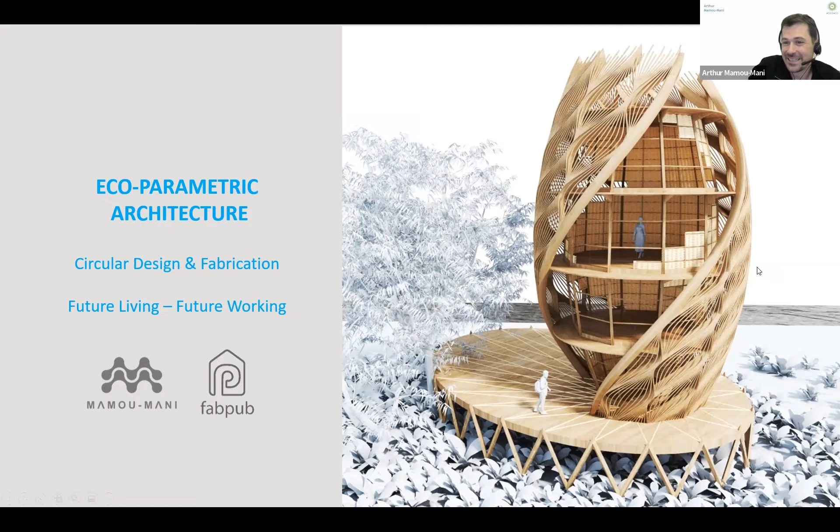You might have heard of us through what we did at Burning Man. Burning Man is a city of the future really, an experimental city where 70,000 people come together around common values, common principles, which I'll explain a little bit more.

I think it will be interesting to see that as part of exploring future cities, beyond living and working in general. Something I find really interesting about that place is that it creates communities that try and improve and change things.

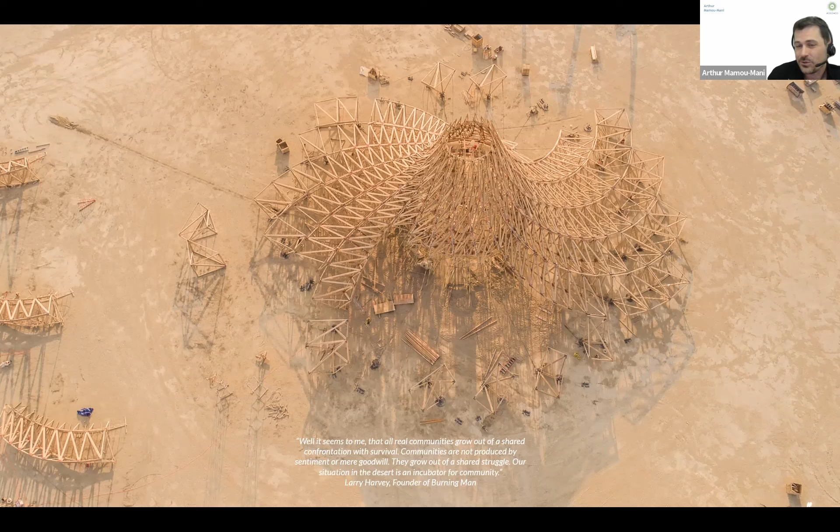The founder of Burning Man says that real communities grow out of a shared confrontation with survival—they're produced through shared struggle. It's really interesting to see how that shared struggle creates pockets of initiatives which eventually change the world. I think there's very much that shared struggle around the idea of climate change that we're all trying to address through our different fields.

There's another thing I thought was really interesting. I don't know if you've read the book by Harari called Sapiens, where he says maybe humans switched from being hunter-gatherers to civilization and crops not because they wanted increased productivity, but because they wanted to build and run temples.

I thought that's really interesting, because our spiritual self is maybe what united us. So beyond functionality—I know modernism was all about functionalism—maybe there's a higher dimension that unites us, something a bit more subtle that we'll discover together, and maybe that's what differentiates a pure technical approach from a slightly higher level one.

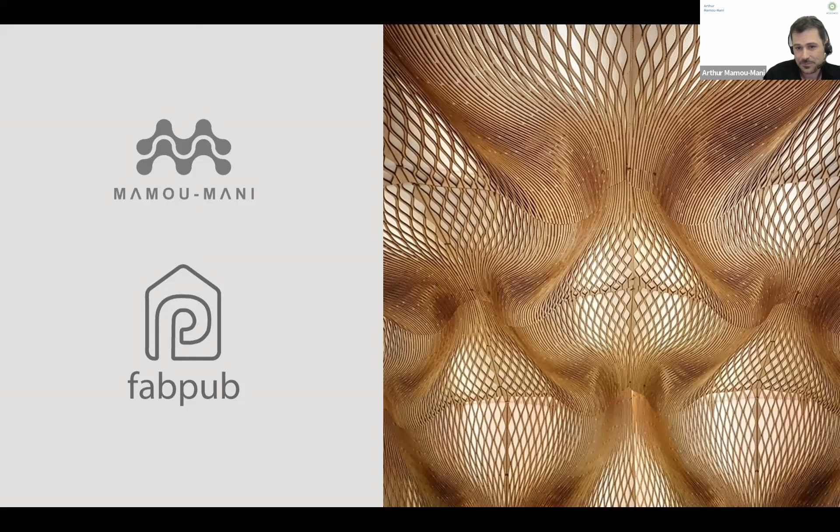So those are our two businesses that work hand in hand. This is our studio in London. We tend to produce things in our office—we're a bit of a mini factory.

Beyond that, I'm very inspired by people like Jean Prouvé—I don't know if you know him. He was a French engineer type who also had his factory in his office kind of thing, and that allows you to produce the thing rather than a representation of the thing, which I think is really important when it comes to understanding carbon footprint.

This allows us to not be fearful of creating. I think when it comes to environmental design, the answer is always that nothing is better than something, because if you just measure carbon, you might as well not exist. So it's really important that we enable creativity without that sort of self-shame, in a way.

So to create ecosystems where we can recycle, where we can use materials that don't come from petroleum, is really important. This is called PLA, polylactic acid, and it's basically a material that comes from sugar.

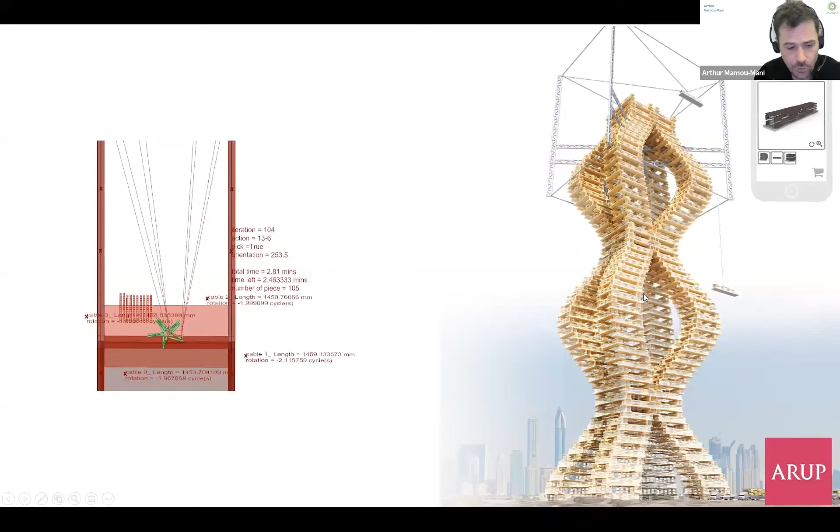But actually, when it comes to environmental design, there are many axes to consider, and that's what life cycle assessments can do.

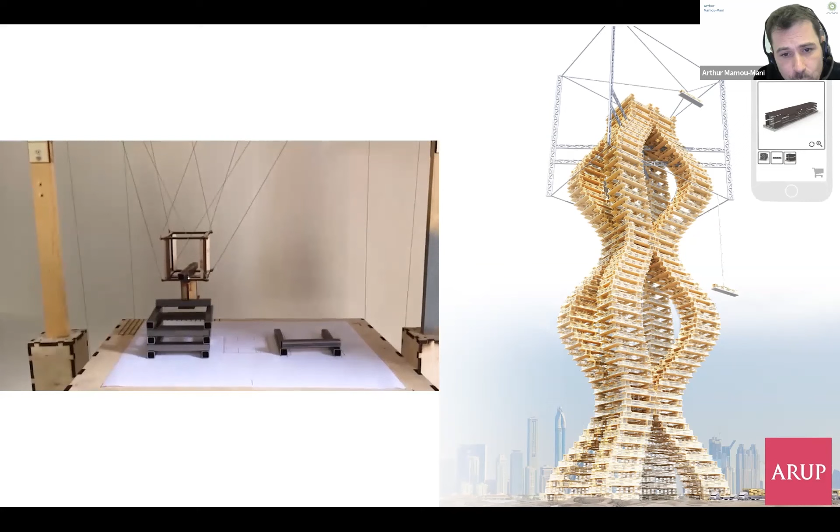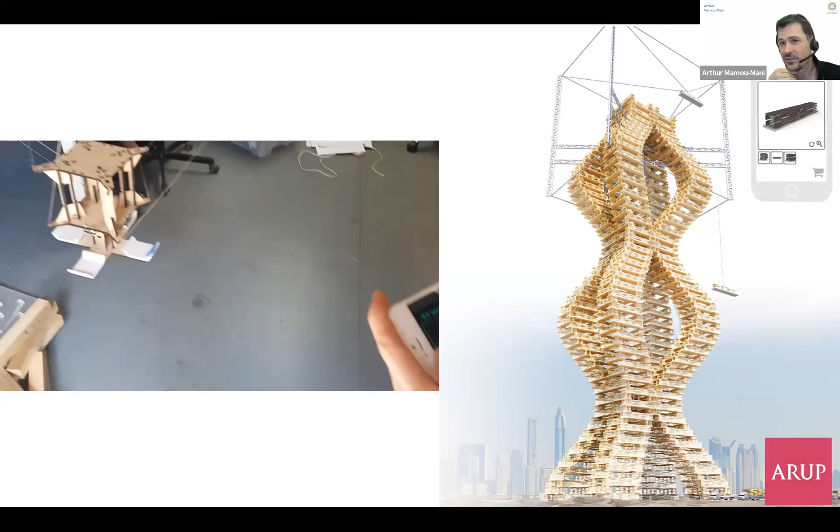So this is a larger speculation of what the future of living could be—a sort of giant skyscraper that not only can build itself but also unbuilds itself. Now, I think this idea of unbuilding is completely overlooked.

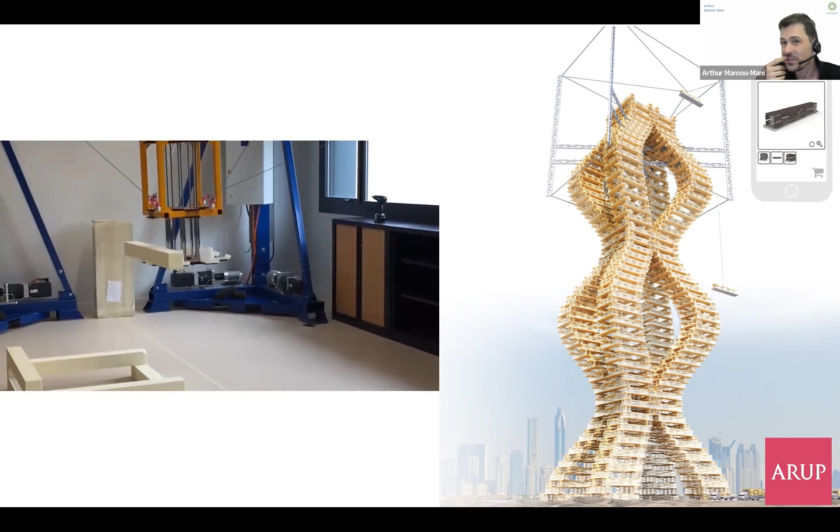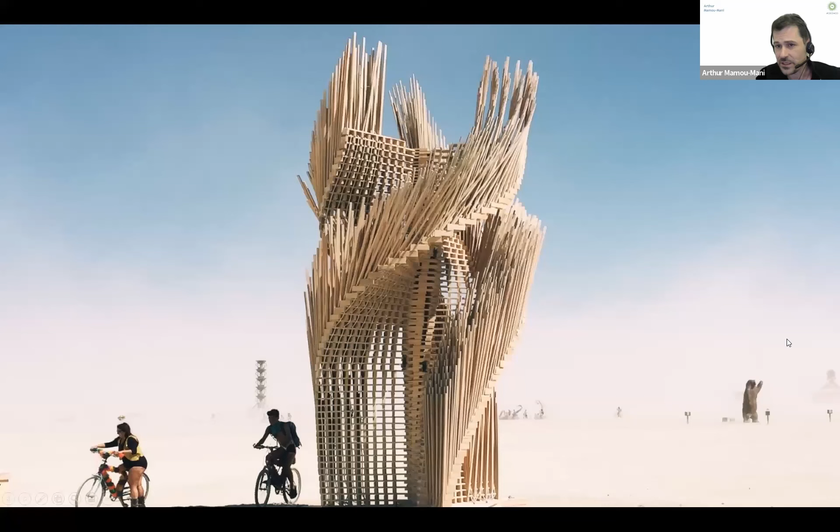It's actually really natural: when a plant doesn't have enough light or water, it just dies, and another plant grows somewhere else. The natural cycle enables that freedom. But when it comes to architecture, you're suddenly stuck with ruins for thousands of years, if you're lucky, like the Parthenon. Most generally, people don't think of the afterlife of a building.

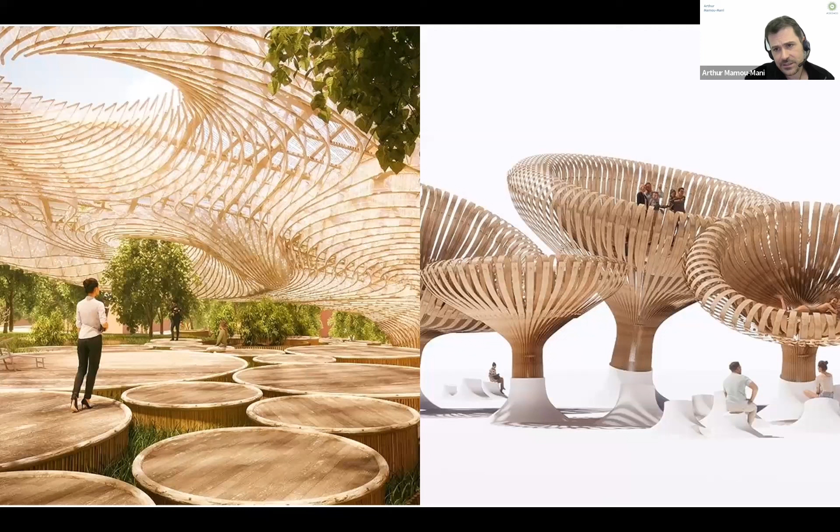I've pretty much been inspired by Burning Man, because you have to think of this afterlife—you have to leave no trace. Bringing this idea of ecological thinking to parametric design is why, I guess, this term eco-parametric came about, because often we think of technology for its own sake versus in relation to natural behaviors.

So this is, for example, some student project that we worked on. This was bamboo being folded according to magnetic fields, with the center of the magnetic points being natural. And this was a sort of piazza that used steam-bent timber.

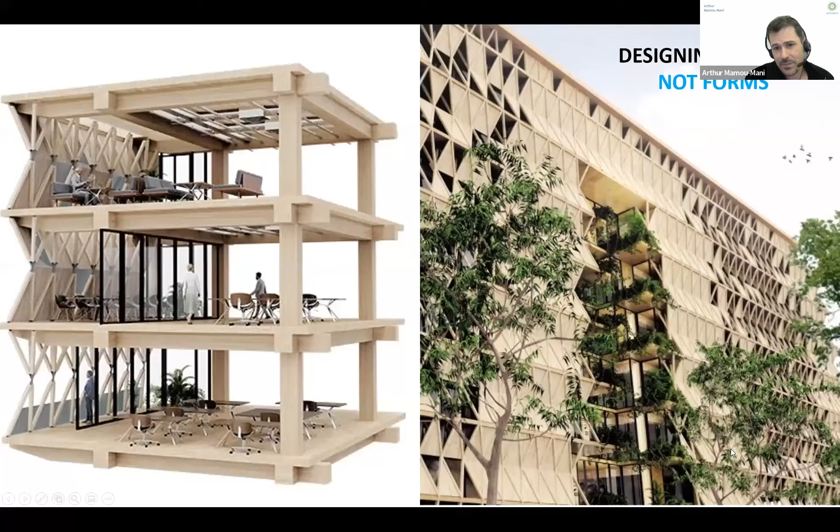This was a slightly more conventional project, looking at the typical module size of a building—using off-the-shelf material, using it as a voxel, and being able to dissolve this timber to create a system rather than a form. I think this notion of system versus form is really important, because then you stop thinking in a top-down fashion and more in a bottom-up way.

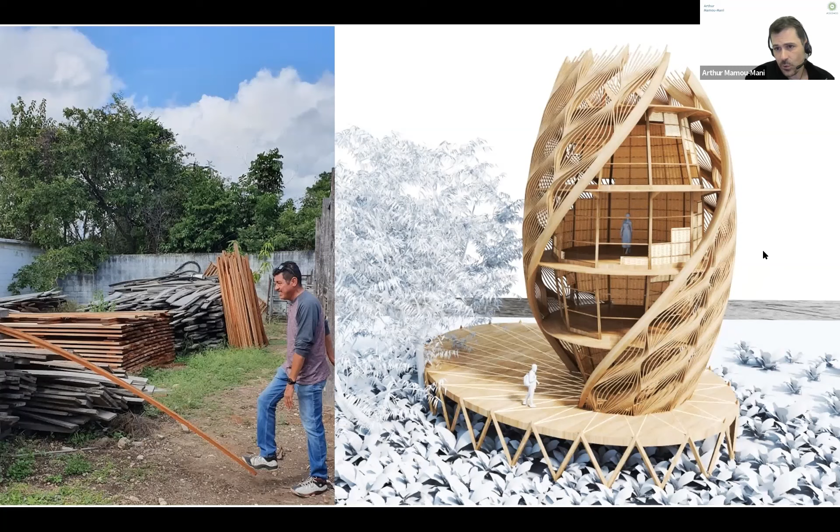In that spirit, this is a project we're doing in Bacalar in Mexico. We based it on the bending radius of timber, and if you were to unfold these things, they would all unfold into straight lines. That's a really important concept, because before, when I was studying digital architecture, we were told you could CNC everything. But when you CNC things, you create a lot of waste.

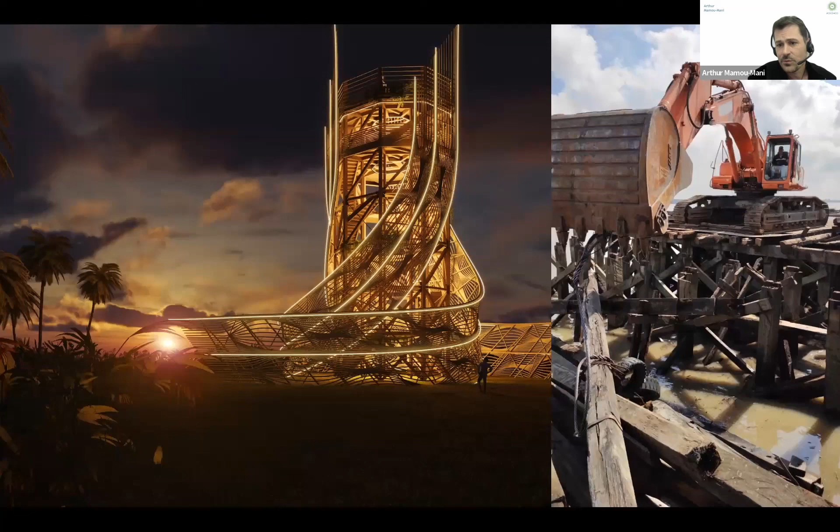You use plywood, which is already a processed material, and then you cut it and create waste. Whereas these are all bent digitally into straight elements, so you actually use timber—the tree—straight out of what it is. I think when you minimize chemical processes, you can also help the life cycle assessment of materials.

When you say 'I'm using wood,' that might not be enough—you might need to dig into what wood, where it came from, which forest it came from. In this case, we're building a tower in Bali, and the client bought an old bridge—a colonial bridge from Indonesia, a Dutch colonial bridge.

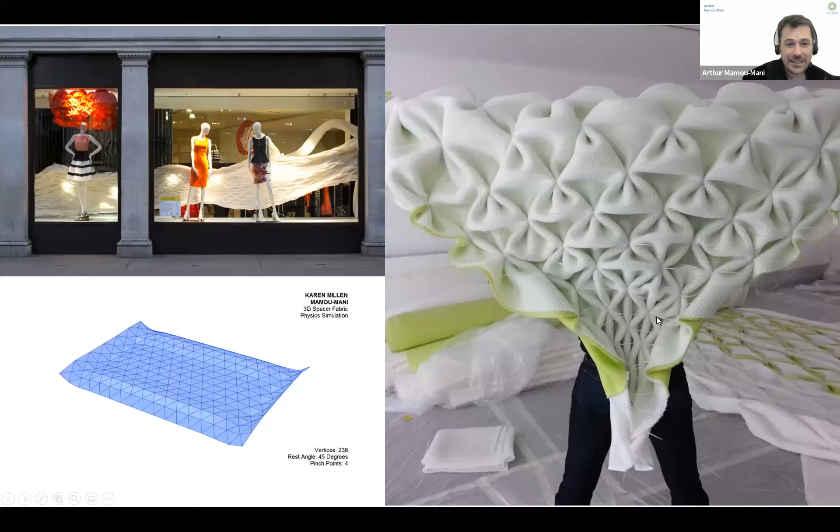He bought it, took off all the timber, removed all the screws, and then built the tower on the left. I think that's a really interesting, beautiful thing—that we don't have to think of projects as their end goal. You can think of your project becoming someone else's project later on.

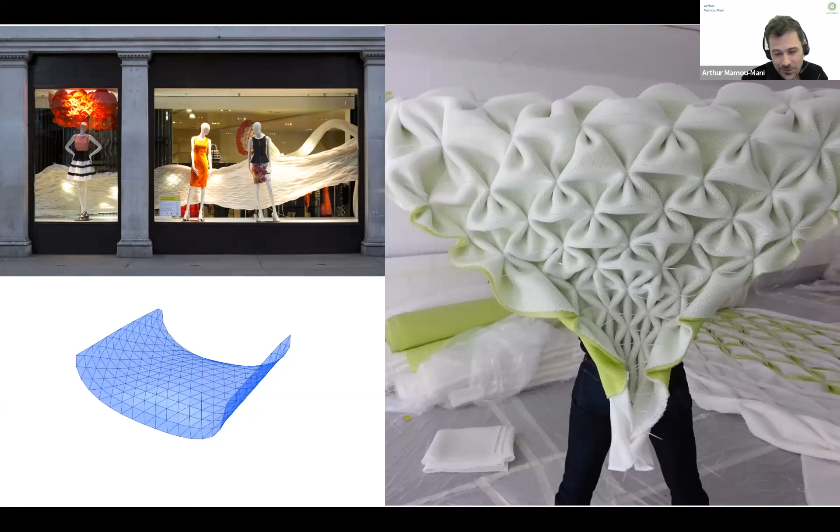That spirit is a bit strange for architects, because we have big egos—as you know, we're known for this kind of character. I think that's really something that needs to change in order for our profession to progress towards accepting things as systems that are beyond us.

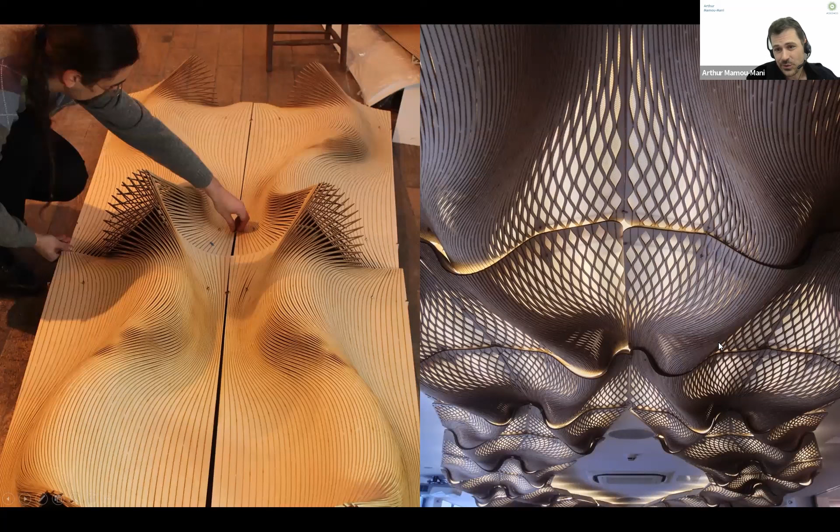So these are a few projects I'm going to show you. This is where we started making a lot of projects ourselves, as opposed to just designing them. This is the wooden wave, and the previous one was a fashion retail experience.

These are based on double curving materials with lattice hinges, with origamis. They're very modular, in that it's one module that adapts through the compression and expansion of what we call Bézier splines. Bézier splines—there was a French engineer who worked at a car manufacturer that had to describe the curvature of cars through an algorithm. We use that algorithm to bend and expand space.

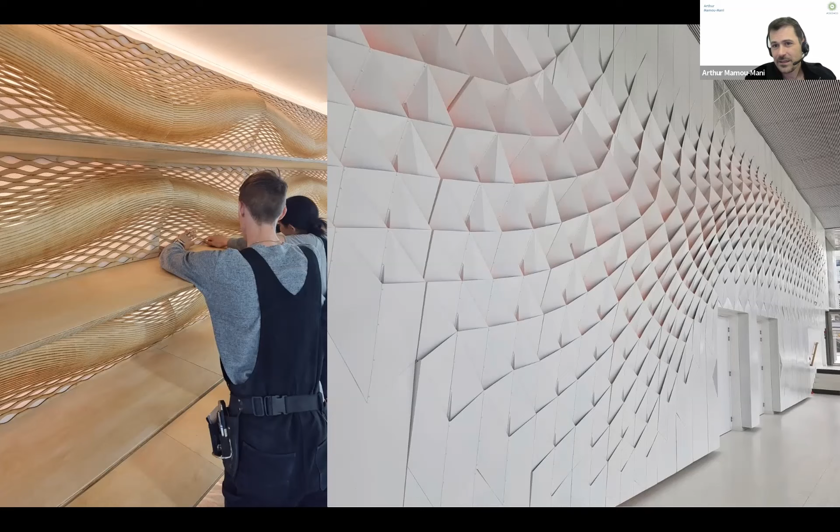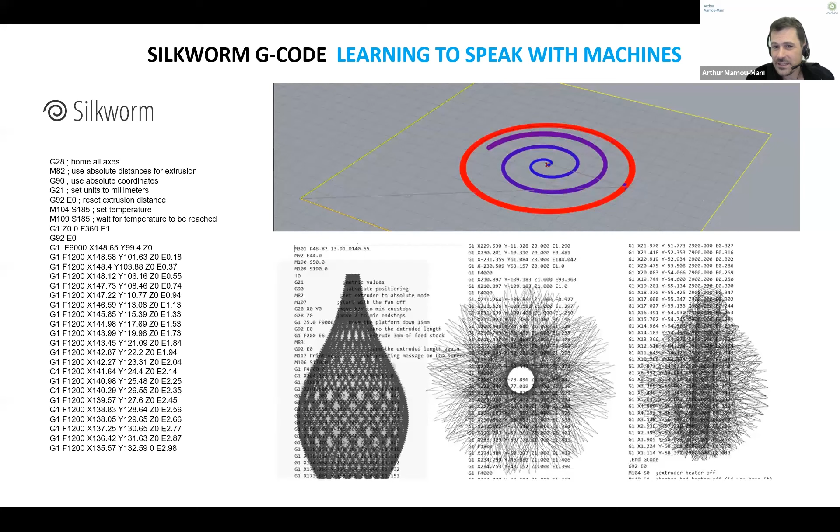It's become a bit of a thing where we try to link that to the lines and extract information for the robots. This is called G-code—it's the information you send to a 3D printer. It's important to understand what it is that you send to a printer, because then you are completely free of constraint, and that means you can be a lot more accurate in the way you design three-dimensional things.

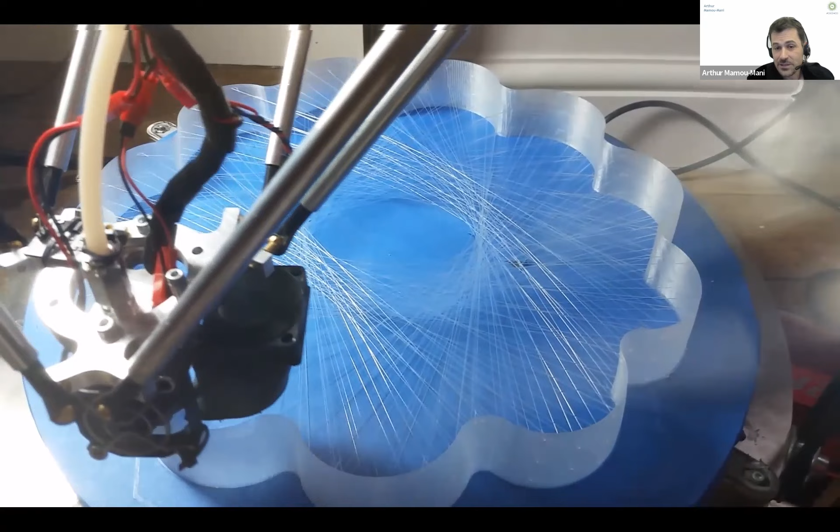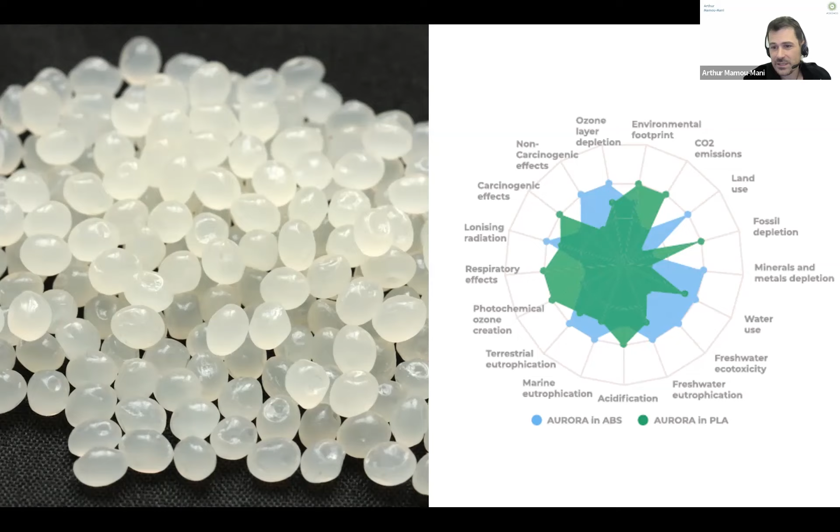Because you're in direct discussion with the craftsman—in this case, the robot. There is a conversation, although it's a robot, that is important to have, because otherwise you cannot be very precise in your analysis of how things are made.

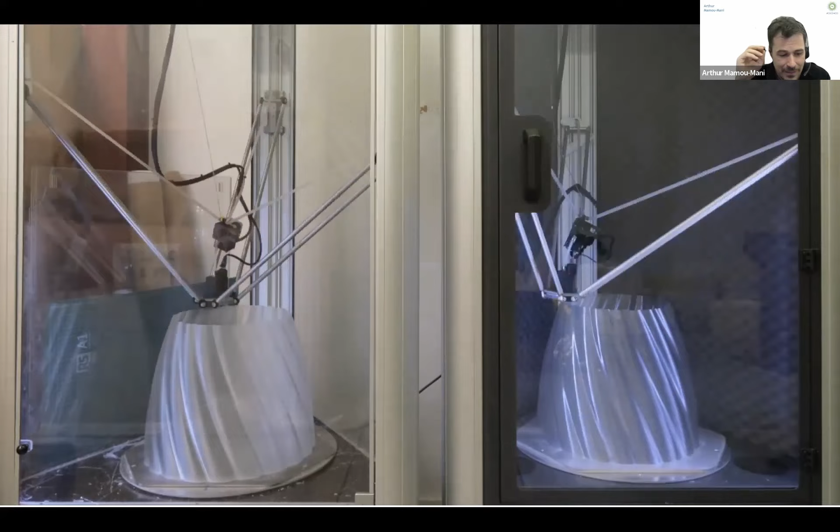So we've taken crazy challenges and keep doing so. I think for some reason, every one of those challenges pushes us to think differently. This, for example, was an installation for Fortnum and Mason in London, and the curvature you're seeing allows us to build very thin shells. Very thin shells are important because you use less material.

So not only do we use sugar, fermented sugar, but we try to minimize the amount of material in order to—and people were very surprised how light these objects were. Because they're light, it means we use less material, and everything has a sort of consequence.

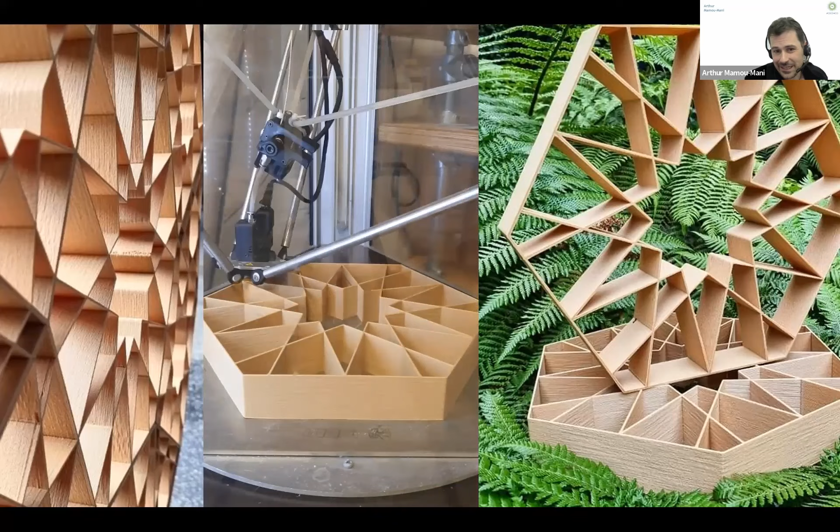We can mix it with wood to create patterning that is less mass produced, to some extent. This is my home in Stoke Newington that we're about to finish, and I look forward to showing you all how it looks. It has a lot of materials that are not petroleum based, and it's very hard to find them for the home—whether it's the fermented sugar of the balustrade, the clay we're using everywhere, clay boards, clay finishes, recycled glass, and so on.

Kebony wood for the facade. Kebony is a pine that's treated so it behaves like teak. It's a very common tree that's just had a resin added to it.

There's a lot of learning curve, and no limit in scale. I put this in because this is my wife's engagement ring, and I worked on it in a similar way to the rest of the project, which shows that I really mean it. This was 3D printed, then the white gold was cast using the lost wax method—the print was replaced with gold, and the sapphires were scanned and introduced in there.

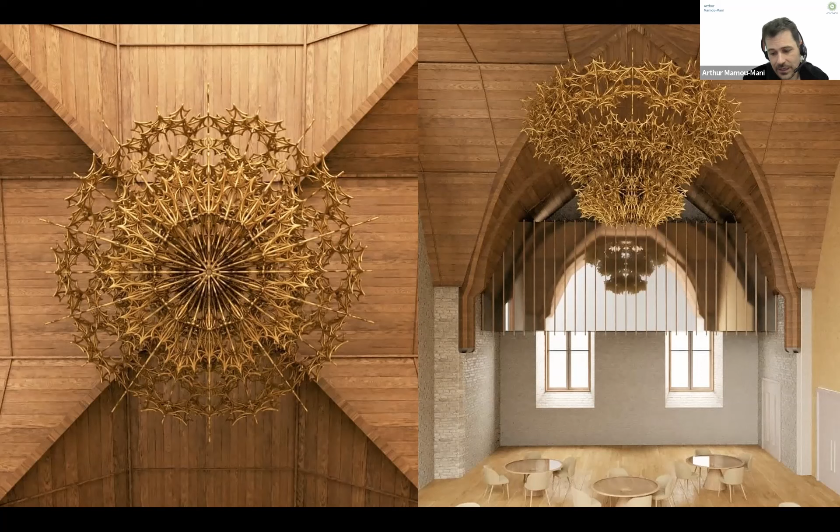This is a chandelier we're doing in the north of the UK, in Scotland, which is 3D printed in a mixture of fireproof material together with bioplastic and metal. So those are things that we can explore.

We've kind of proved to some extent that we can scale up slowly. It's getting there—we're approaching the facade world now.

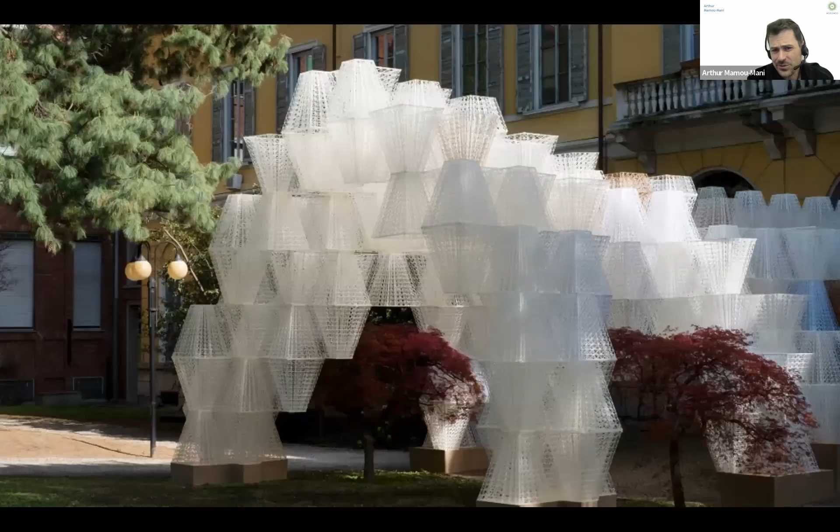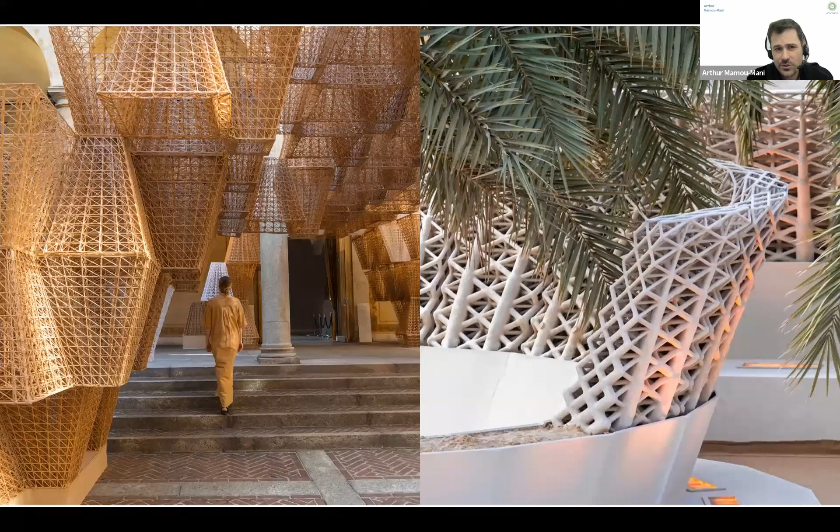This was for Cos, a fashion brand. It's called Conifera, a project made of 700 bio bricks placed together to form this sort of journey, as opposed to a form. It wasn't quite a form—it was more of a journey that went from the earthly to the sky. You can see these almost look like they were hand woven, which is quite interesting.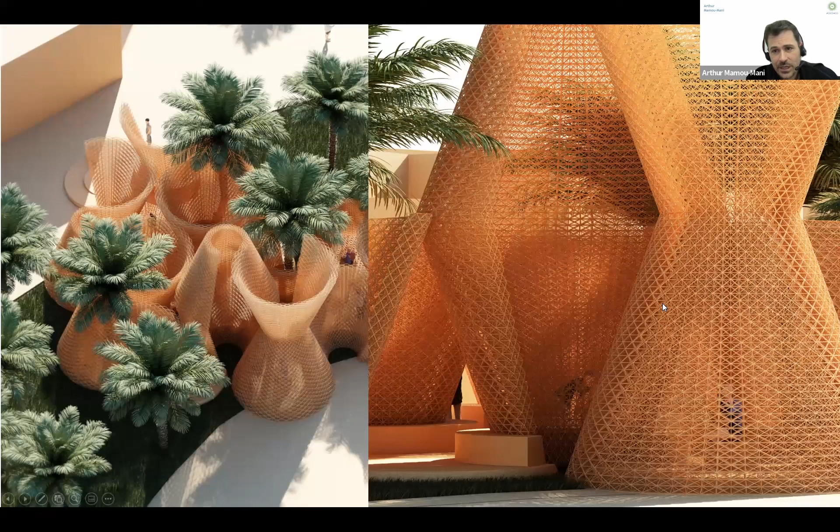This was a project we did with Chris Precht, a great architect from Austria. It was 3D printed in sand. We started by looking at that space and playing with the trees that were there, and developed this module that we later realized we could print with local material, i.e. sand—you can see the biophilic link here. Biophilia just means the love for nature, the understanding of nature, and being part of it. Each of those lines changes in thickness based on the forces going through the system.

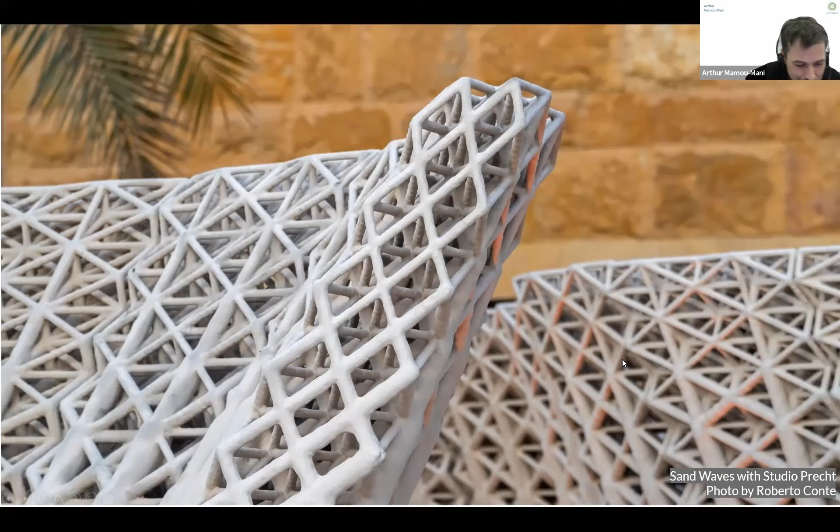All right, 14 minutes—I have 6 minutes, and I want to bring you a little bit more into the desert. Bear with me. This is Burning Man, which has 10 principles that I think are really important for the future of living, whether it's radical inclusion, self-reliance, self-expression, or communal effort.

You can recognize a lot of the discussions happening at the moment about inclusion and environmental issues within the principles of Burning Man, which is why I find it so interesting. It's also heavily inspired by the Californian ideology and things like Buckminster Fuller's idea of spaceship Earth—that we all need to consider everything as an integral, holistic system rather than separated elements.

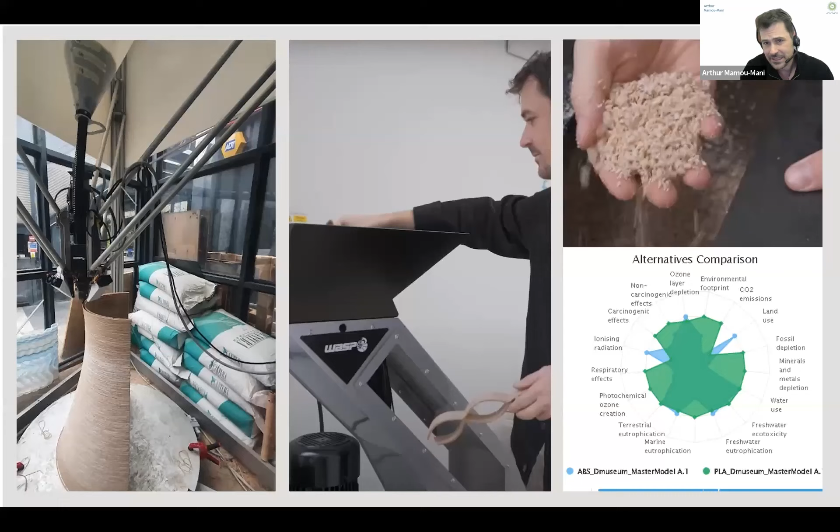So I showed you that. This is a city of 70,000 people that unite for a week, create, then unbuild itself and recreate itself, where everyone is a bit of an actor of the city rather than just a spectator—so an artist. Instead of doing art about the state of society, we do art that creates society around it, as Larry Harvey, the founder, was saying.

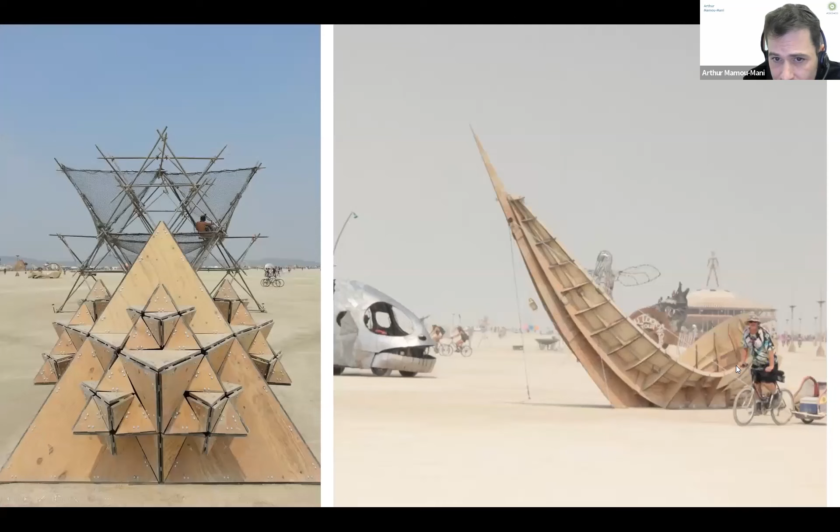With our students at Westminster, we've been trying to experiment with what that means. This is, for example, a piece of ply cut in half creating this reciprocal structure that leads to projects which are simple to build and assemble, based on wasteless designs. These are some examples of what we've built and learned, from very complex parametric digital stuff to simple 2x4 pieces of wood assembled together.

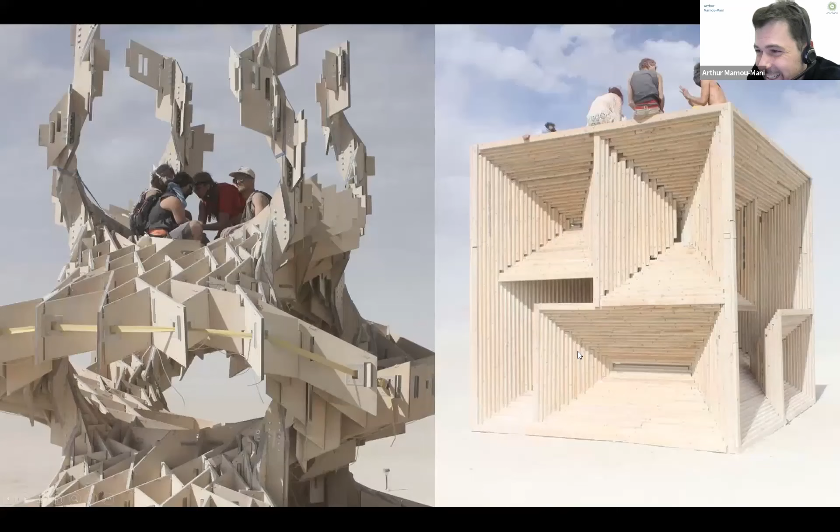We've learned a lot about transportation. This is a truck with the project that was on the right, while the project on the left was placed messily in the truck. I remember the truck driver telling us that the truck is probably one of the most important designers in the structure—the truck itself. When I talked about having a discussion with a robot, you can have a discussion with your truck as well, or with your plane, or with your shipping elements.

And I think that's really something we ignore: the logistics, and the logistics are key to the building being actually green or not. So this is on the right, the bismuth bivouac, and then on the left, the project we never finished. That was a very complex puzzle.

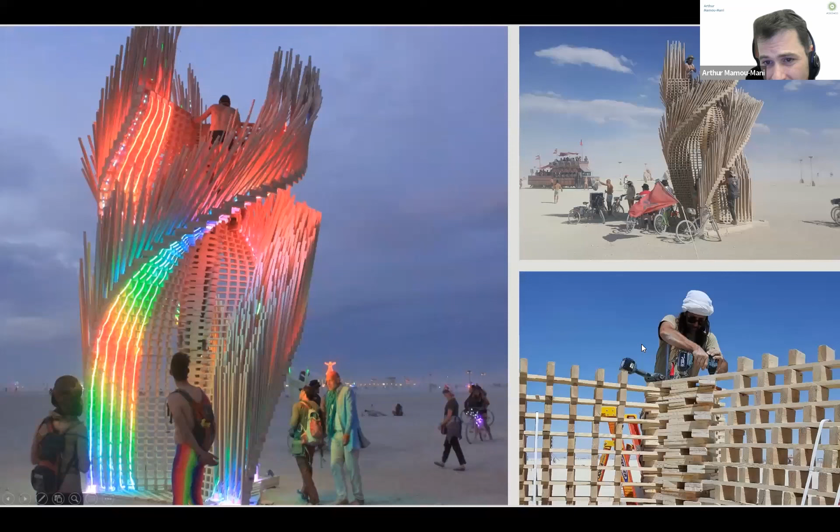We've learned a lot from off-the-shelf timber, how wood comes out, how it can be cut simply, and how we can create structures that follow mathematical rules.

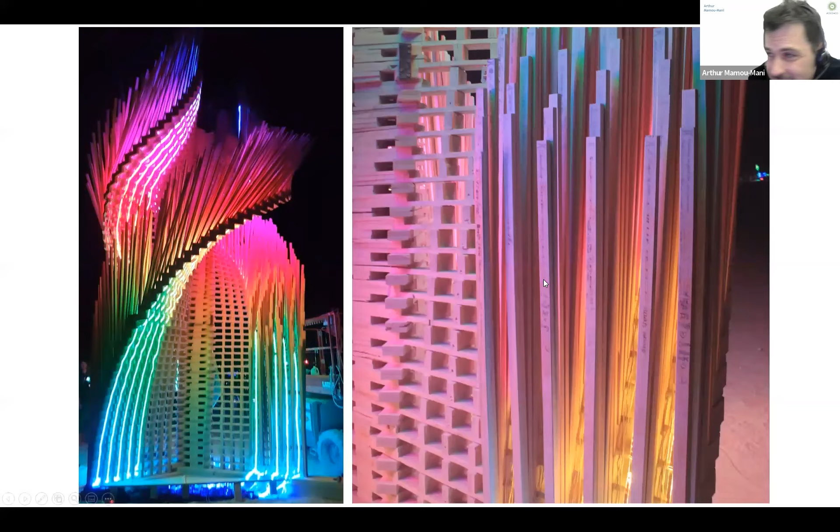I just want to show you this little video of the LEDs going through these tangents. And you can see on the right, people writing down their dreams. There was a really nice dialogue with the community, which we thought was really interesting.

This is the temple at Burning Man. Every year Burning Man has a temple where people can write things on the structure, and it's often quite emotional things.

At the time I was working on a hotel for Virgin Galactic, which is about going to space and doing space tourism. They needed a hotel before going to space, and this idea of a sort of recursive galaxy came about.

So this is very simple. It's a recursion in the computer. You tell information to a vector, you say it to move, rotate, on and on and on. But as you do this, you can change the parameters, the angle, the length, and so on.

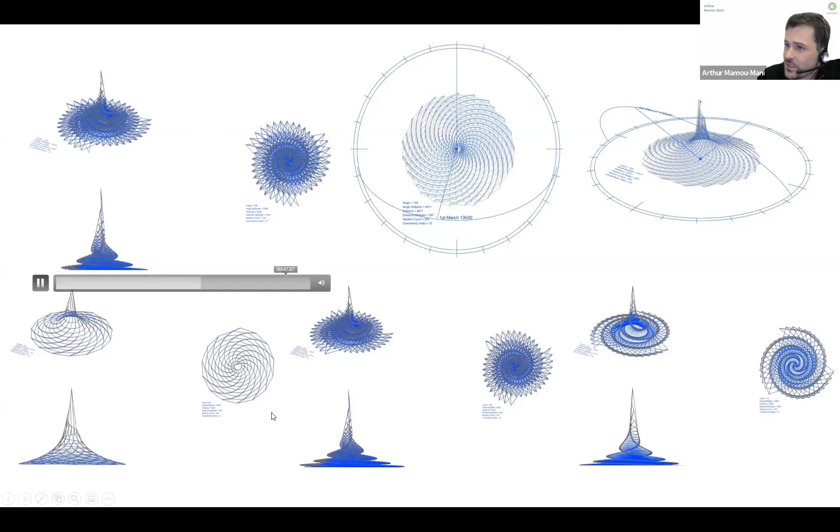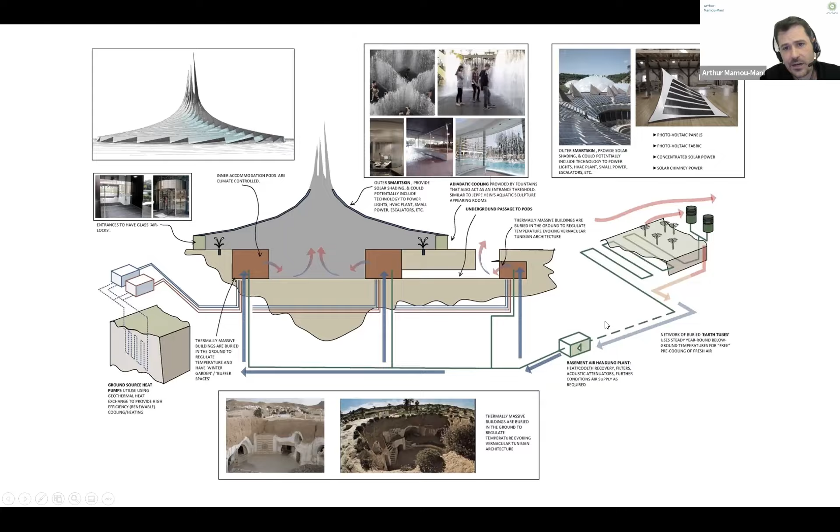What I find interesting is when you start linking this with environmental design, for example letting the light go through in winter and diffusing it in summer, but also looking at the thermal mass of things, like how we can use the cold air to minimize air conditioning. Air conditioning is about 10 times worse than CO2, so we can work with all these aspects to think of the structure as a system.

Galaxia was a sort of reinterpretation of that building in the desert, based again on compression and expansion of space. You can see the center of Galaxia being a lot denser than the rest, because it's based on the black hole idea that it would compress and take everything with it.

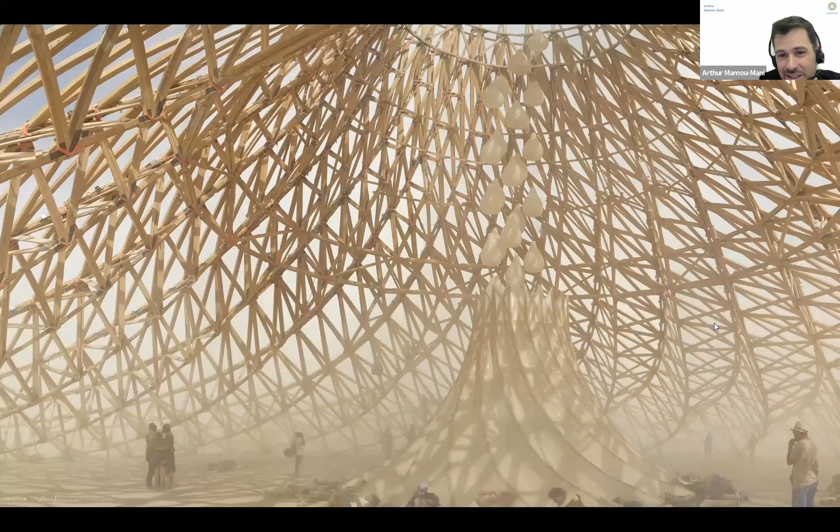It starts with portals for humans and then goes through. What's interesting is how people were using that project as a secular temple, and everyone saw the sort of metaphorical aspect of every piece. There's no columns, so everything seems to float and works together as opposed to in a hierarchical fashion.

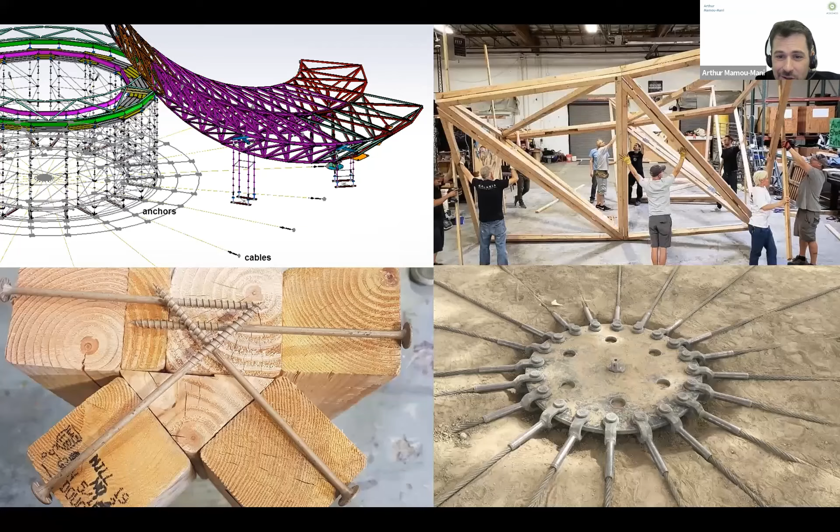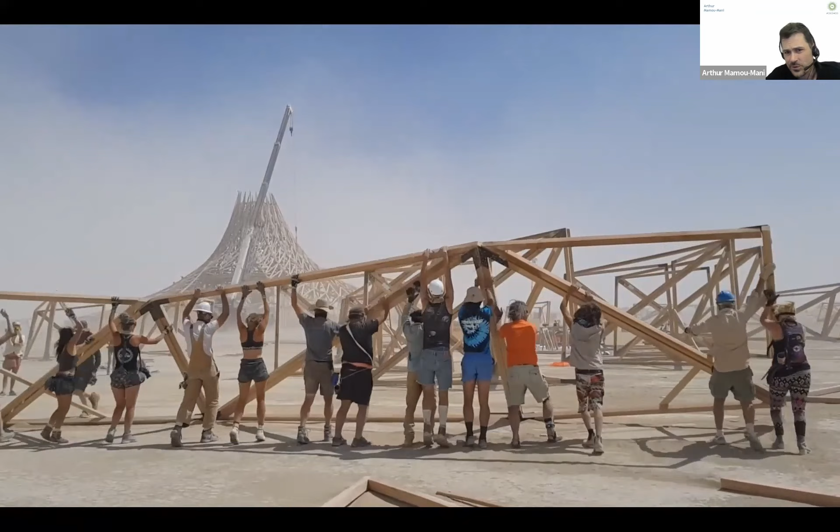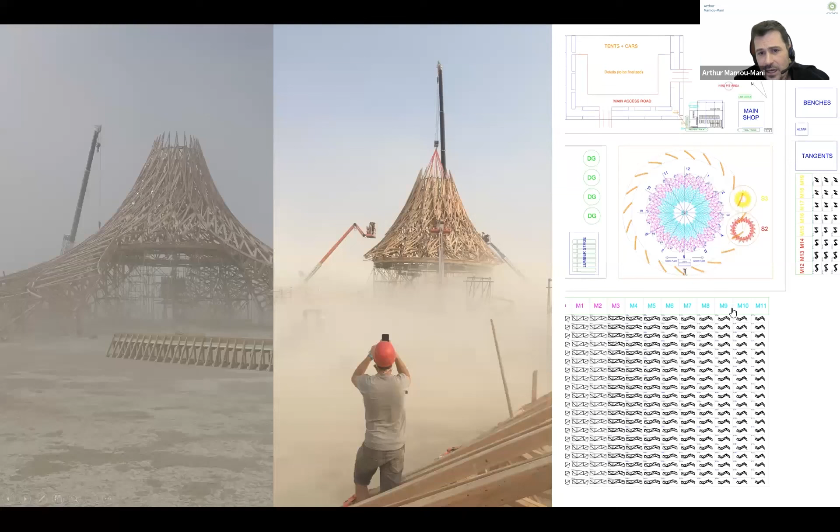You can see how it was built with a big bike wheel in the center that held everything together, because we couldn't build foundations, for example. Each one of those modules were assembled into these bricks as well, similar to the Conifera project, but these bricks were assembled in timber with laser cut metal connections actually targeted towards the forces going through the project. We were all together, 120 volunteers building this, living together, building this for about 18 days.

And built from the top down, to give a positive spirit to the team, because it was hard. It was very hard, very intense. We built this from the top down, which I think is quite interesting.

Then we opened it to the public and had these really beautiful altars and messages, and I got married in there. Remember the ring? I just thought it was really nice to talk about the future of living, the spaces that you work on.

Being able to transform what happens inside into something that I can relate to and that others can relate to. It was a really beautiful event.

After a week of it, we all sat down together and set it on fire. It's not ideal, obviously don't want people to burn buildings, but it was a ritual of letting go. This notion of letting go and removing everything in order for it to start again the next year is something I find quite beautiful.

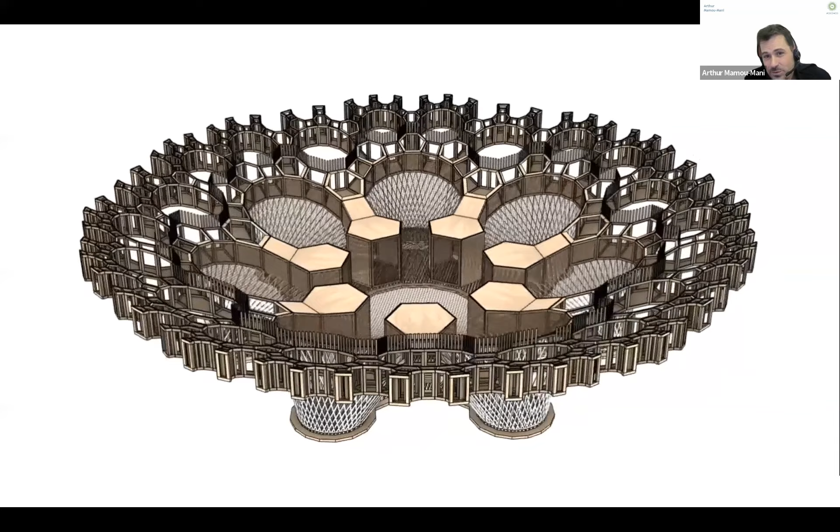I mean, I think none of us are here forever, and so the idea of afterlife of the building and what could happen is something I find really interesting.

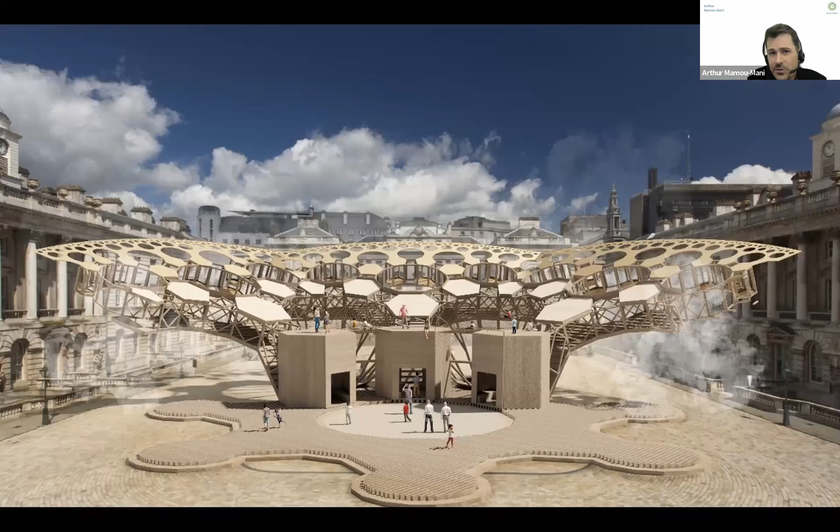So this summer, our plan is to build this and disassemble it. This is called Catharsis, based on a mathematical geometry, and reassemble it in London, then have a dialogue between cities where we can bring a project to two different places and have people dialogue through architecture in cities. So I'll finish here.

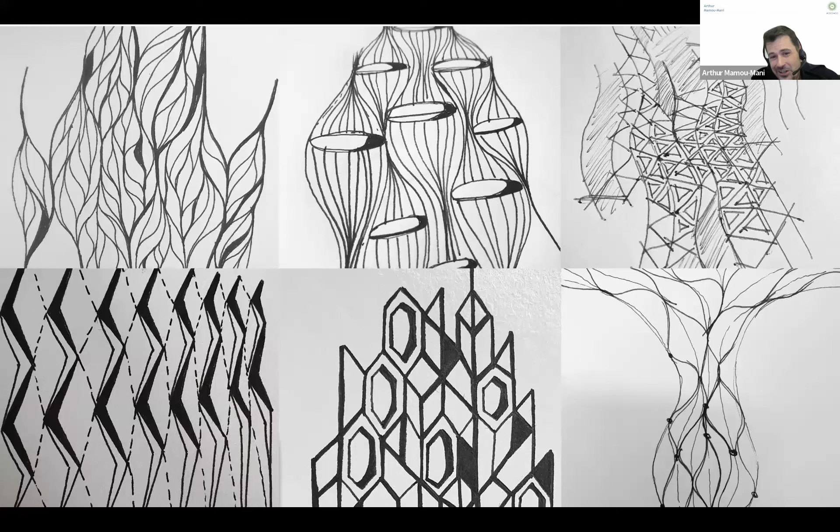Obviously all this is very digital, but I think anyone can access that kind of thinking. These are sketches that I work on to show how these relationships could also be hand-drawn, a way of thinking that is beyond just the technology.